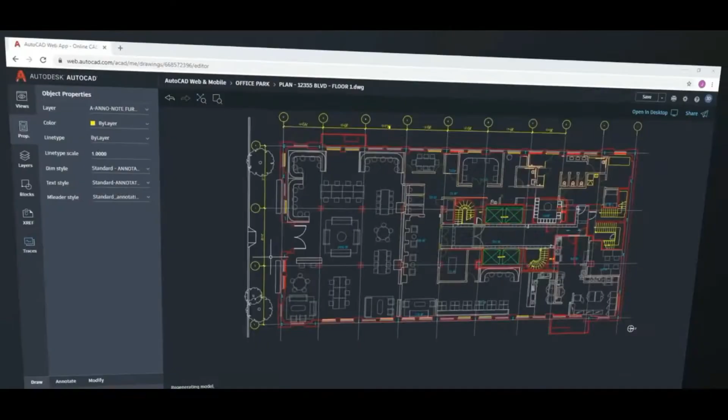For today's tutorial we're going to create a detailed section for building a brick-faced full-fill cavity wall for a residential property. By the end of the lesson you should have a far better understanding of how we build exterior walls for new build houses and extensions.

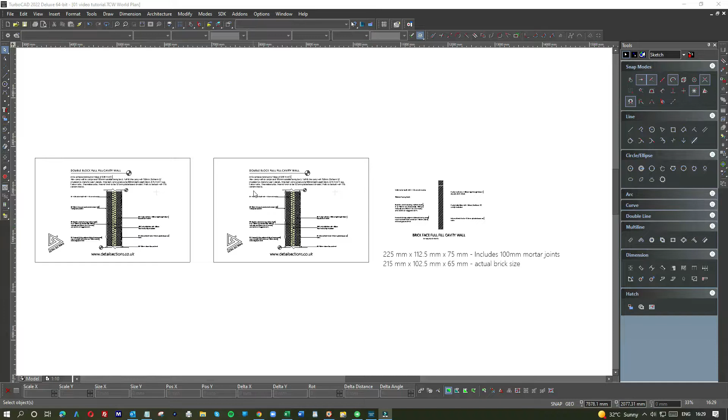So as you can see, I did a little preparation for us today. What we're looking at here is a detailed section for a double block full fill cavity wall. If we look at the wall here now, you can see it's made up of 100mm 220 blocks stacked on top, and then we have insulation in the center and then blocks again on the outside.

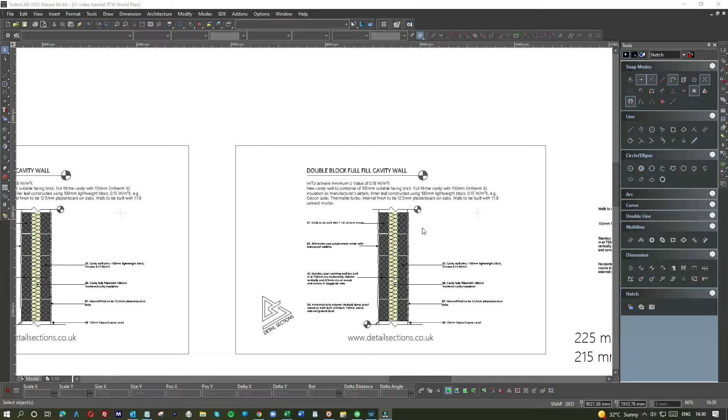So what normally happens is this then gets rendered, sand and cement rendered, painted up on one side, and then on the inside gets dabbed out with 12.5mm plasterboard. So what you've got then is rendering, block, insulation, block, and plasterboard. The few bits and pieces in between, you've got stainless steel retaining wall ties.

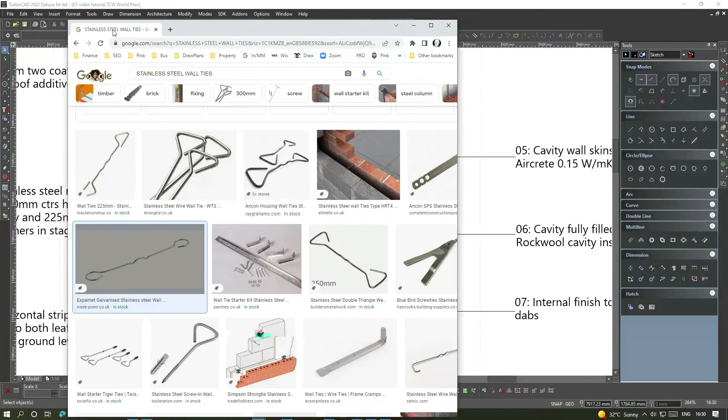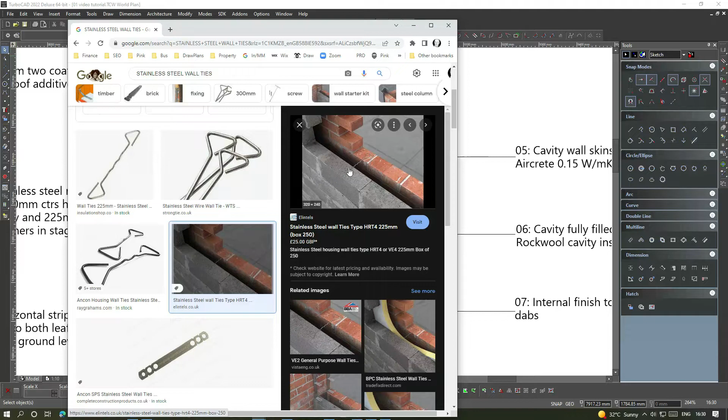I'm going to show you something I've just pulled up earlier, so you understand what we're looking at. These are stainless steel ties that are used to put walls together. If you see it on that particular photograph, the ties rest on both parts of the wall, one on the inside and one on the outside. So when the next block is put on and the cement is added, it ties the walls together so they don't bulge and fall apart as time goes by.

So they're put in at 750. Every 750 they're put in, effectively every 3 blocks. So what else can I tell you? Right, let's have a look at the bottom. On the bottom here, this is from the foundations up, so that's your foundation, which is your DPC. This wall is from your DPC up.

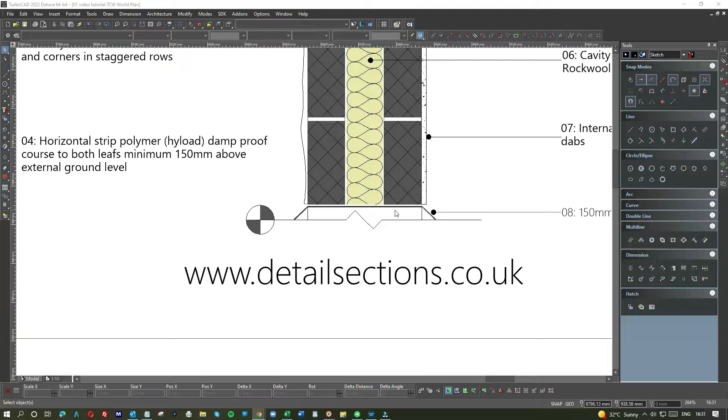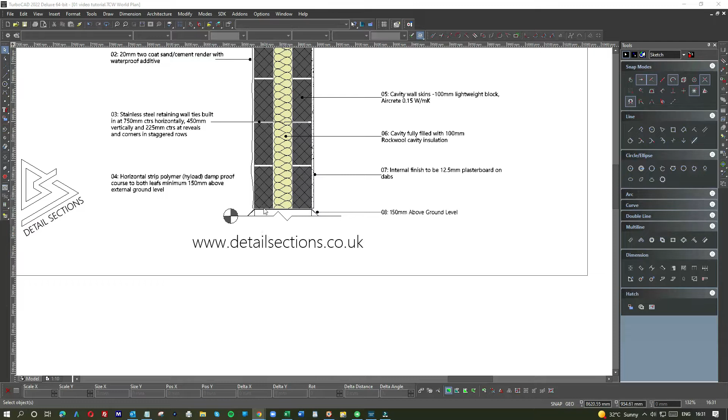So the black section here represents your DPC, which is effectively a damp proof membrane, and it's usually a gauge of about 1000 or 1200, and that's what they put in to stop the damp from coming up into the new wall. So we start off with your foundations, etc., and then they build up. But from the DPC, you've got your blocks, and that carries on up until roof level. All you have to do is add these stainless steel ties to keep the walls together.

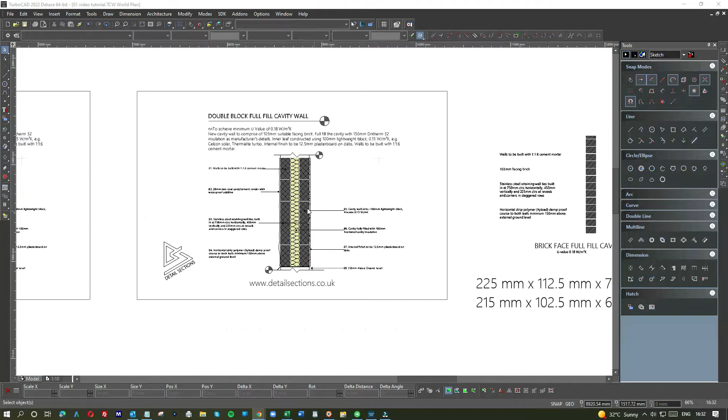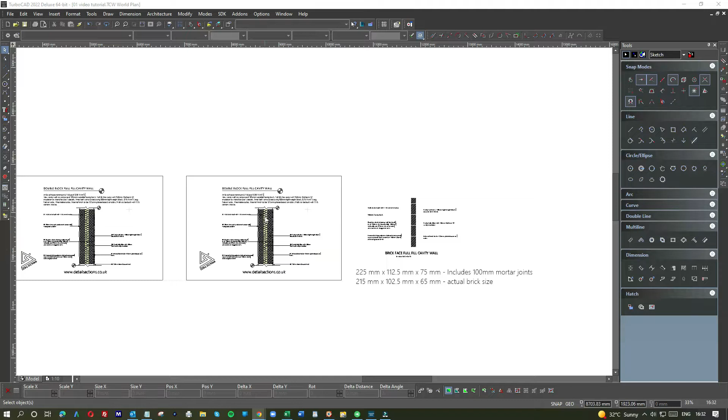So you've got it: block, insulation, block, rendering on the outside, plasterboard on the inside. So that's a full detailed section for a double block full fill cavity wall. That's not what we're doing today. That's there to demonstrate, and we're going to utilize the detail, because all we're going to do is change part of it to turn it into something else. What we're actually going to do today is create a detailed section for a brick face. So in other words, we get rid of these blocks and put bricks on the outside.

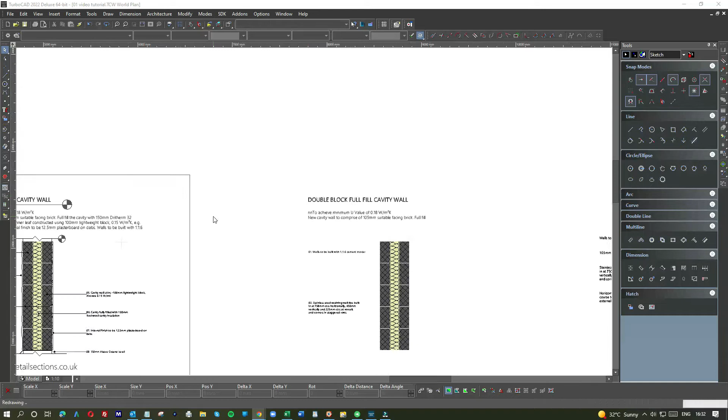So we have all the elements. I've prepared them over here, and you're going to watch as we do them. So let's get on with it. So basically this is just a copy of that one here, and I'm going to utilize it as best as possible to make the changes. Incidentally, if you're a designer working within the architectural side and building construction, these are elements you need to learn, so you can do that research online.

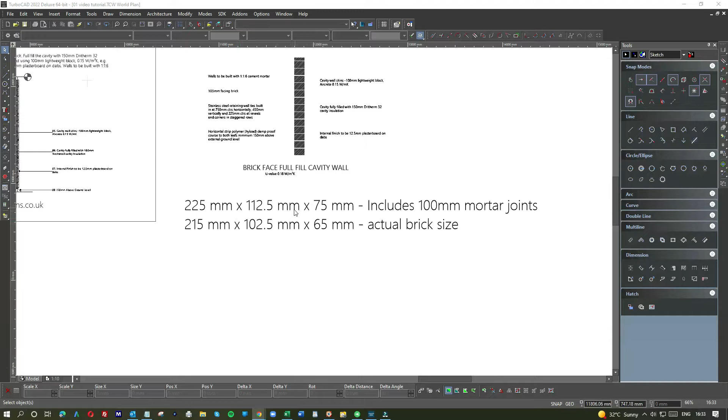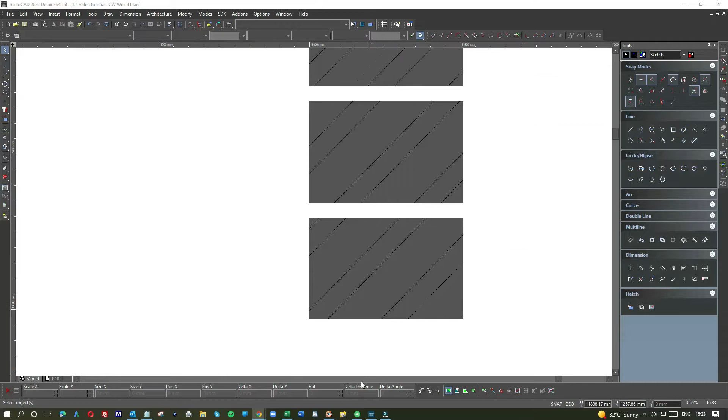But it's basically the size of an actual brick, which is represented here. The size of a brick is 215mm long, 102 wide, and 65mm high. That's generally how the bricks are, and you need to know those sizes. You also need to know that for the cement that goes in between the bricks, we make an allowance of 10mm. So in this case, it's 65 for the brick, 10mm for the sand and cement, then a brick again, and so on.

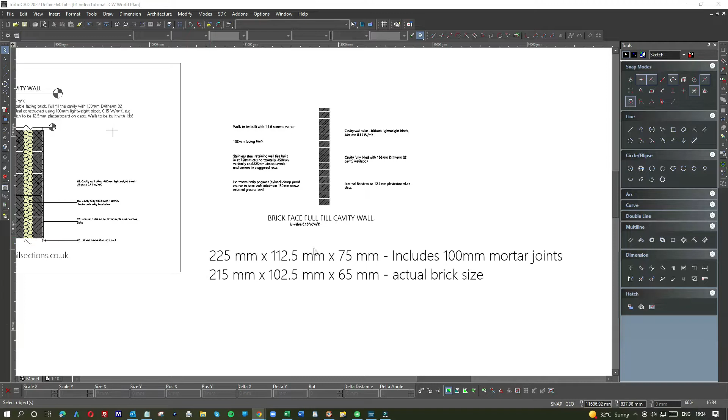But this is information you should have ready to hand. In effect, a little spreadsheet with sizes, and as you work your way through the detail sections and the building and construction details like door sizes, block sizes, brick sizes, you should be making a note. That way it'll be ready when you're actually doing some drawings for an extension or new build. You'll have some of the information to hand. So it's good practice, if you have to research to find out the size of something, to add it into your spreadsheet.

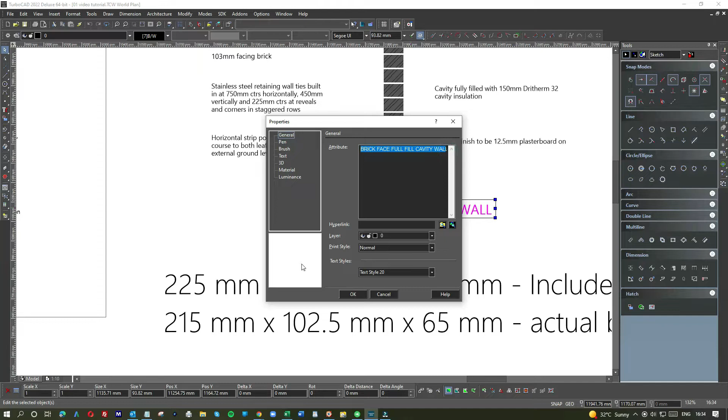Okay, so let's see what we're going to do here. We're going to stick everything in this particular box. So what I'm going to do is, let's start by getting this text here. If I double click: brick face, full fill, cavity wall. Well, that's okay. In fact, I could utilize this. I don't need to change anything.

So the aim here is, we have access to loads of sections. We get sections from all over the internet, and we create sections, and we have hundreds of detailed sections. But what we want to do is unify them, give them a format, and make the colors uniform. So within a year or so, these things will be all over the internet, and they'll be linking back to our website,

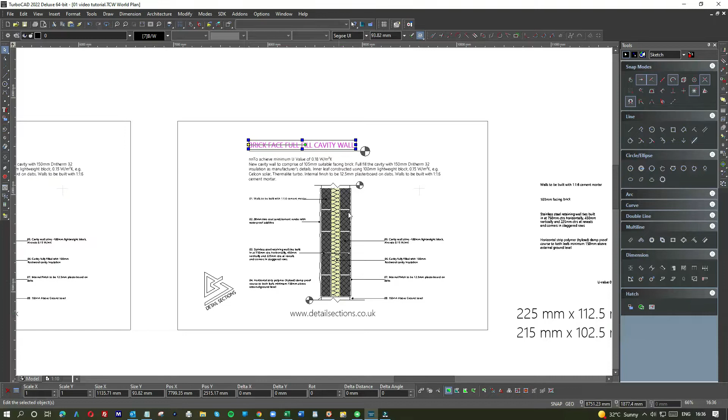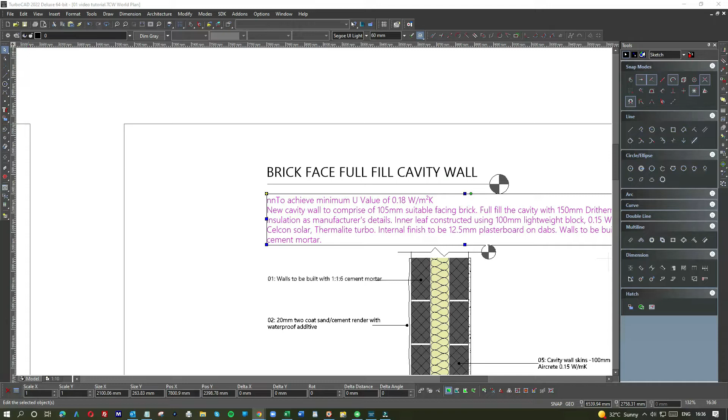Okay, so generally speaking, there's an editorial to go with any kind of detailed section, such as the editorial on this one. Well, I need to get that editorial, and I've been remiss because I didn't get it just yet. But let me move on, and I'll come back to that.

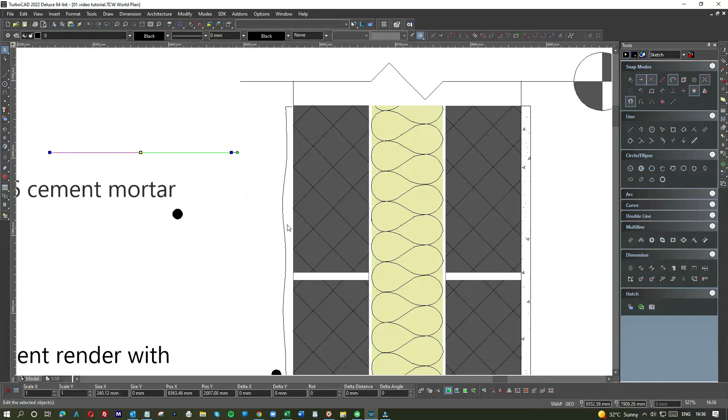So what I want to do now is change the block first. So in order to do that, let me start getting rid of some of the elements here. These are good. Yeah, there we go. It's a good experience for anybody interested in learning about building and construction detailed sections, because eventually you're going to have to make some.

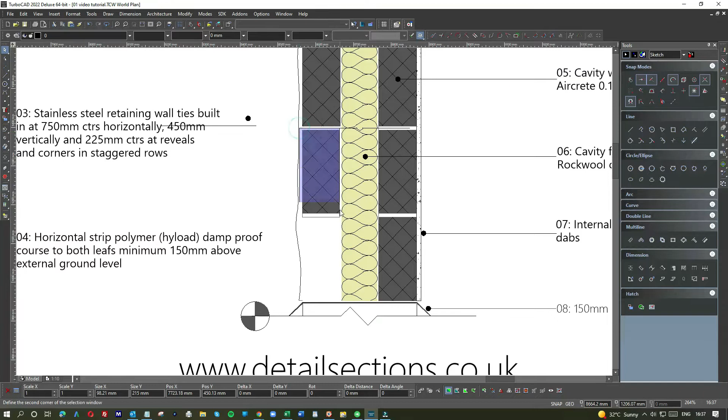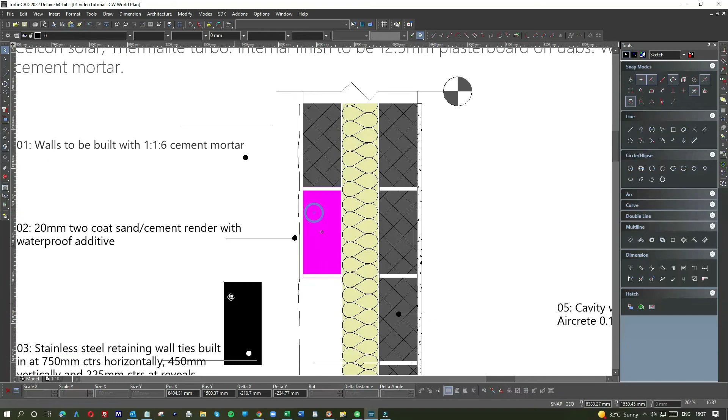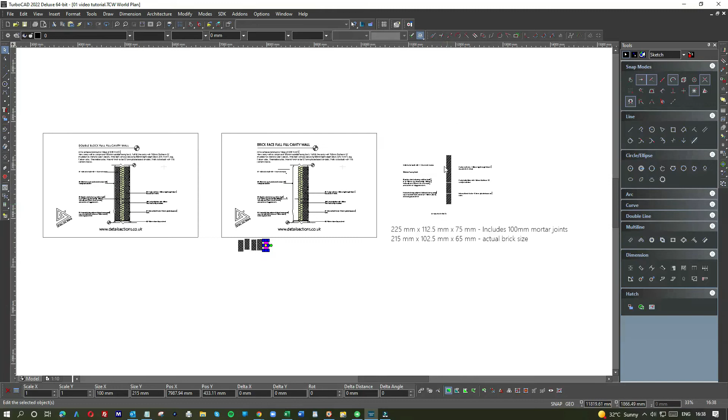My company, Draw Plans, we're architectural designers in London, and we do all sorts of new builds, extensions, and so on. But what we get asked for all the time is building plans, for other architects or for clients who have had architects create the design plans. For reasons beyond me, they then need plans for building regs, and generally I believe it's because the designer they picked was probably reasonably cheap to save a few quid, and then doesn't have the skills or the know-how to create the build plans. So these are really essential skills.

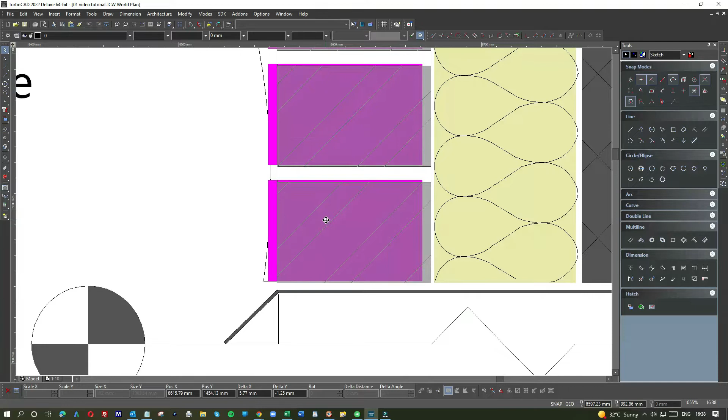Right, so now here we are. I'm adding the brick. There we go. We don't need the render on the outside, so that's gone, as is that. So yeah, okay, we need another brick or two here. Well, that's fine, we can deal with that. Two more bricks, say.

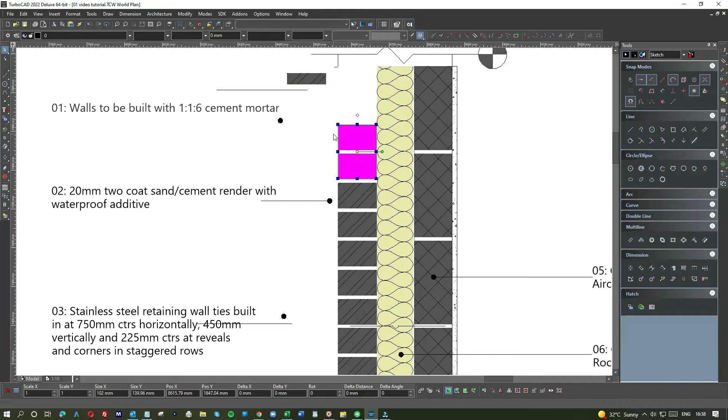So basically, when you're doing detailed sections, this is 10 mil, tab 10, you don't have to build from scratch. Generally you might have done a detail section that's similar, and you're only changing part of it, which means it doesn't take that long. But if you're starting from scratch and you haven't got a clue how to build it, then obviously it's going to take a bit of time. Don't need that. That's lovely.

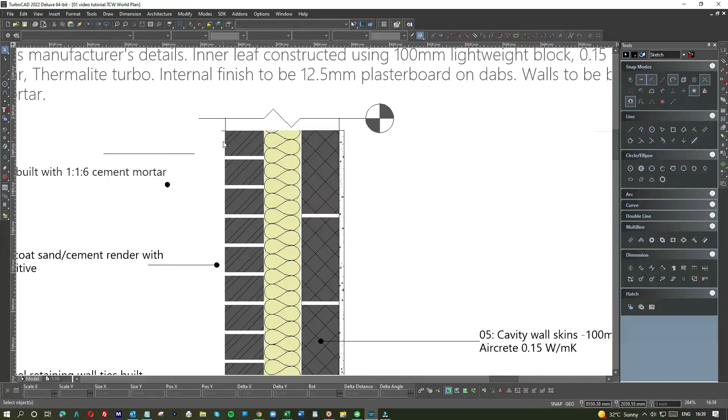So now, as you can see, we've got a brick face, full fill cavity wall, and that's your insulation, that's your block inside, that's your plasterboard. So all I have to do now is redo the editorial, and we don't need this one because that's to do with rendering.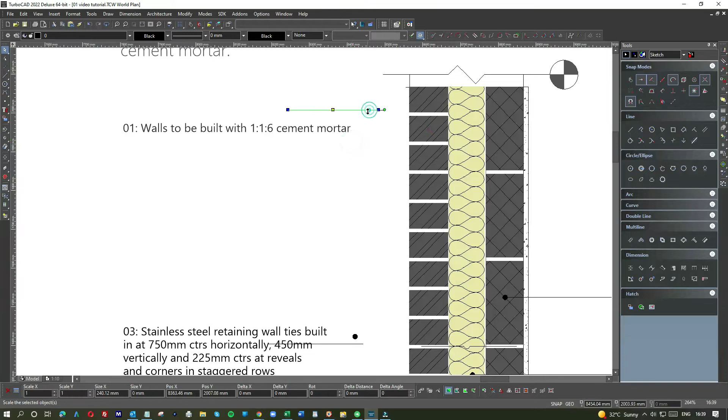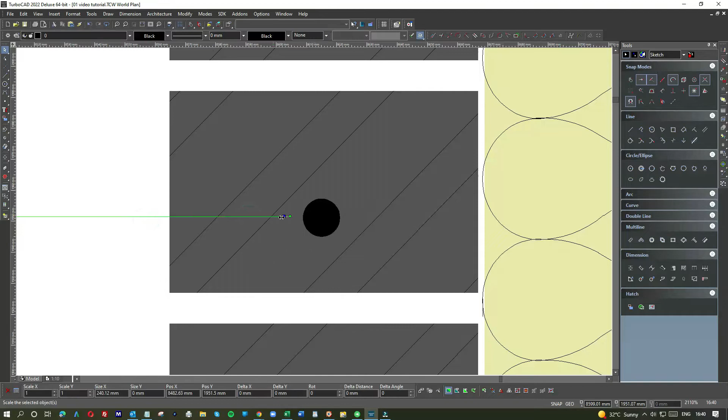Walls to be built with cement mortar. Well, that's reasonable. That's a reasonable assumption, isn't it? Okay, so now my little dot needs to come to the front. Draw order, bring to front, and let's see if I can. I do two of them there. Getting old and shaky, that's what it is. Right.

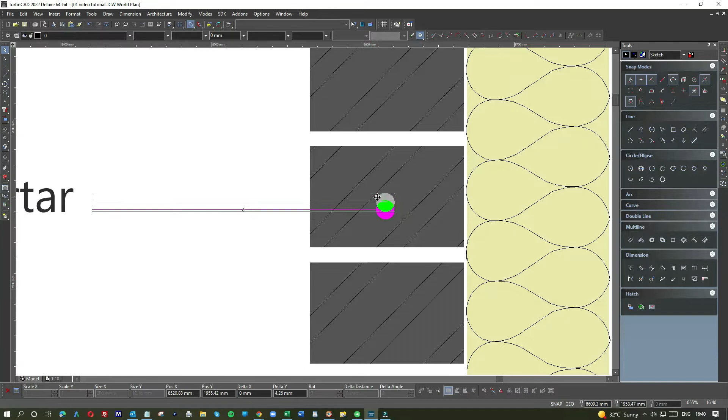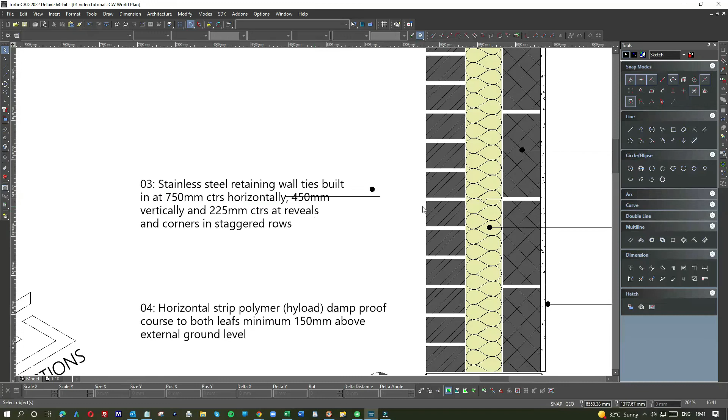Sometimes take off snaps, it's much easier for manipulating these few bits and pieces. And I try to give as much detail as I can and do it decently. See, now this one is disappearing, the draw order needs to change, needs to come to front so that it looks right. Now that looks right. So what else? Stainless steel ties, they're in the right place. This will probably need to be repositioned as well. Oh no, for reasons I guess I don't know.

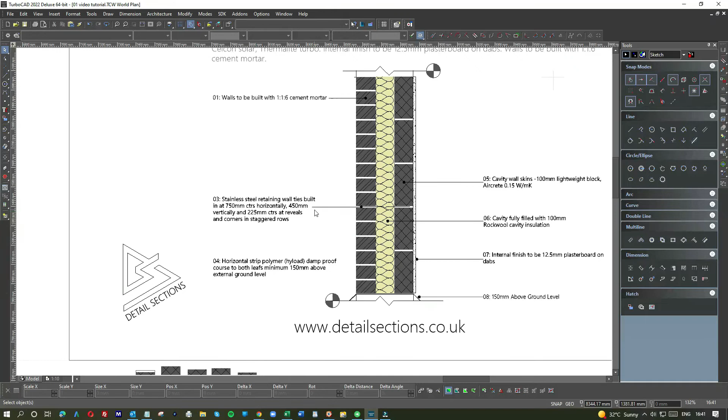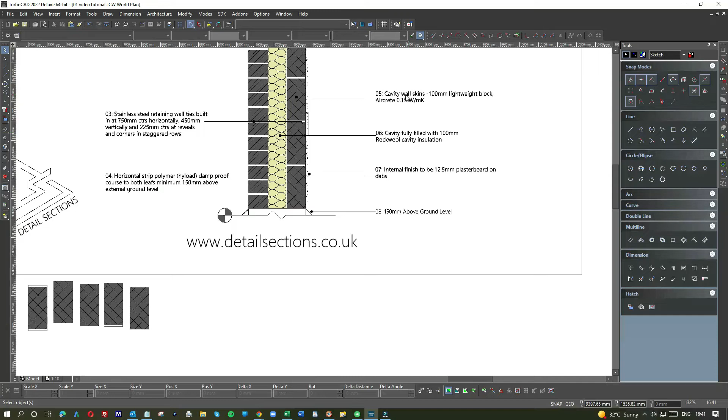Okay, so if you're having difficulty, just slow it all down, replay the video and go back to it. Damp proof, 150 above ground level. They're making a reference to this one. I don't need to put a ball and line on it because it's already done on here. That's correct. Cavity, that's correct. Cavity wall skin, light block. So all that is correct, but it is numbered differently.

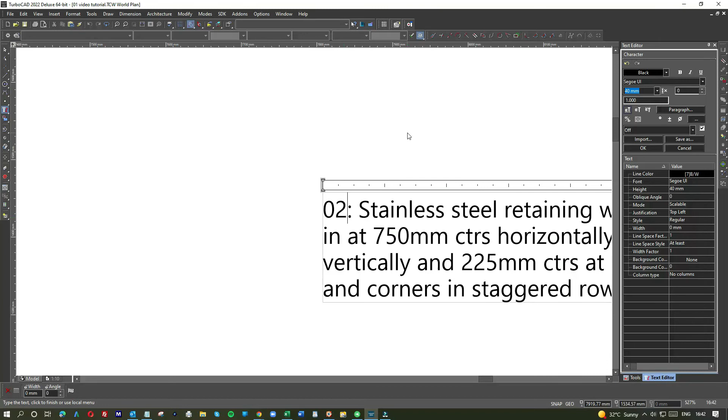So if we just have a little check on this, these are multi-line text, yeah, that's what I figured. So multi-line text, you should know, but you have to click on the multi-line tool to be able to edit it. And so we're looking at 3, clicking off, that's 2, and then this will be 3.

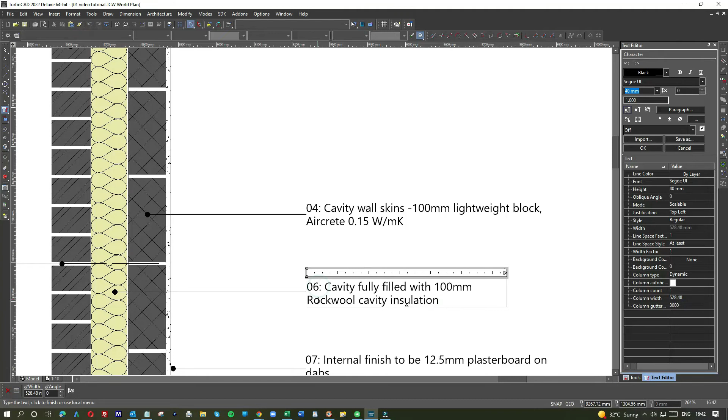I wish I had an introduction like this to detailed sections when I was younger, because that would have been a really fast way of learning how to do the detailed sections. As it was, I spent years and years learning, but learning the hard way, as they say.

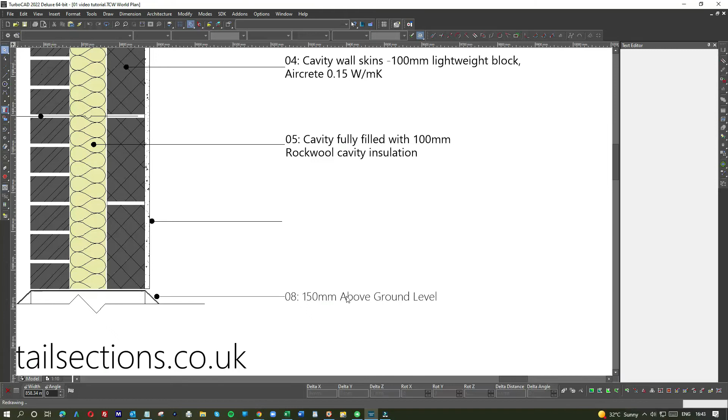Six, and then this one probably isn't multi-line down here. Let's see if I'm right. Yep, that's 07. Okay, right, let me pause for a moment and grab the editorial. Okay, I've now got the information I need, so all I need to do is copy and paste, and I should be able to do that within here. There you go. We're nearly there.

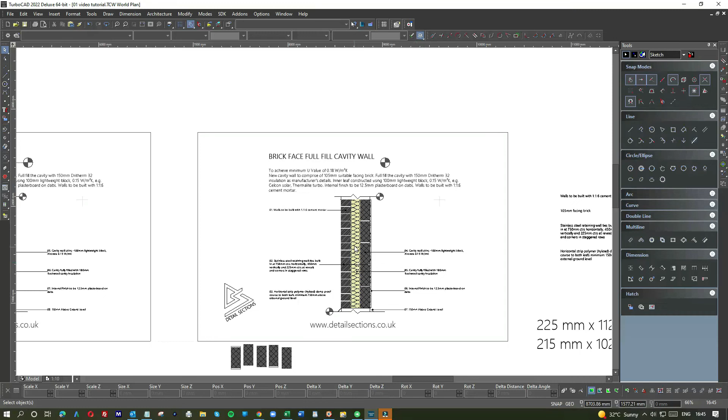Right, so all the little decorative bits are in. The editorial is correct. The actual sketch is correct. Let me see. Yeah, that's it. So I can remove all this one, and we've got a brand new detail section. Okay, hopefully you've learned a little bit on this one.

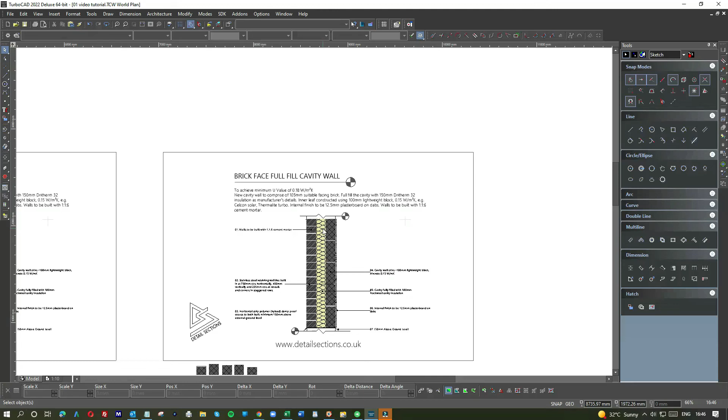Now I'll be doing loads and loads of detail sections over the next few months, and a lot of them will go on YouTube, which gives you guys the opportunity to see how to build, learn, and be able to make your own. And it's a really fabulous thing if you can learn how to make the detail sections, and even more important, come to understand the component parts for various structures. So probably the next ones we'll be doing will be focused on the most popular ones for extensions, so we'll be doing foundations, for example, flat roofs, and those are the detail sections that will follow up after this one.